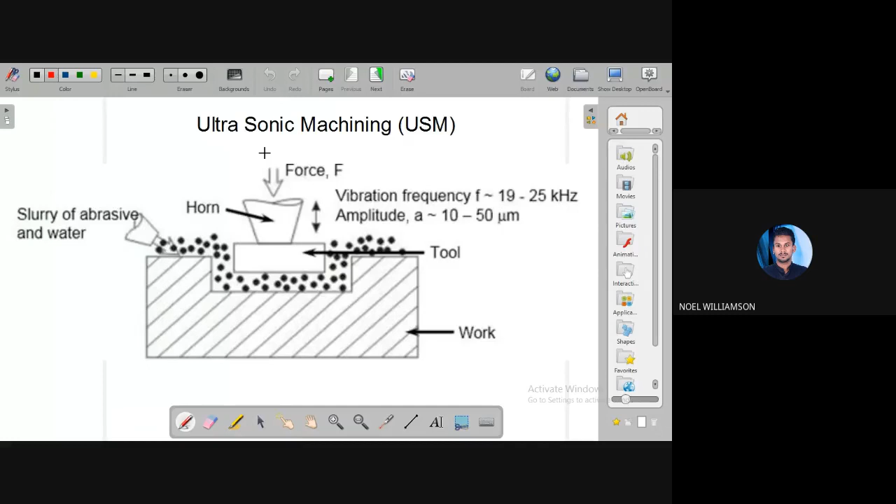Ultrasonic machining, we will see how it works. By the name itself we get an idea that this is a machining operation using ultrasonic frequencies, meaning vibration. Using the vibration of the tool with ultrasonic frequencies of the order 19 to 25 kilohertz, the tool will be vibrating.

Basically, here is the workpiece, and the tool is vibrating with low amplitude. Amplitude means the movement, how much it will be moving. So here it is low amplitude, meaning a minute movement at the micro level, in the range of 10 to 50 micrometers.

With low amplitude and high frequency, meaning within a second how many cycles it will vibrate, the maximum frequency means maximum velocity. So with high frequency and low amplitude vibration, this machining process is done.

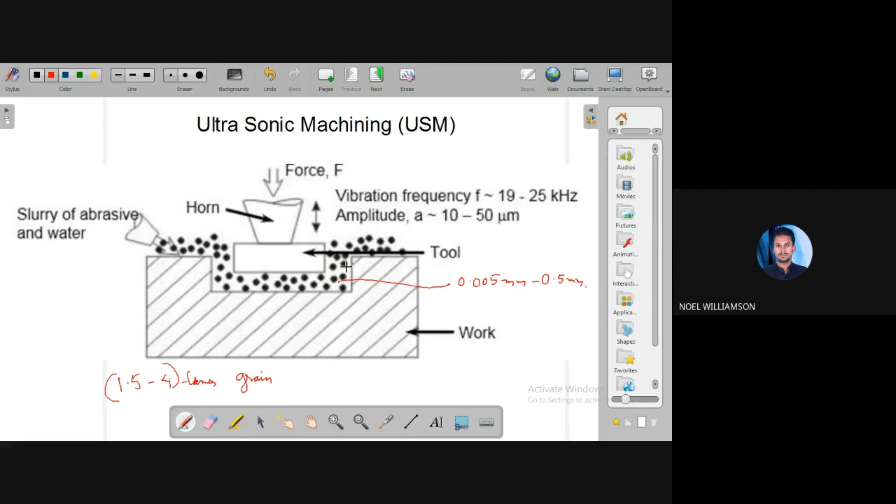Suppose mechanical energy is converted into electrical energy, or electrical energy into mechanical energy. Here, we are giving an electrical signal using electric power, which is transferred into mechanical vibration, and this vibration is given to the tool.

There is a provision for spraying the abrasive slurry, which is placed over or forced into the gap, and the tool which is being vibrated is given a particular feed.

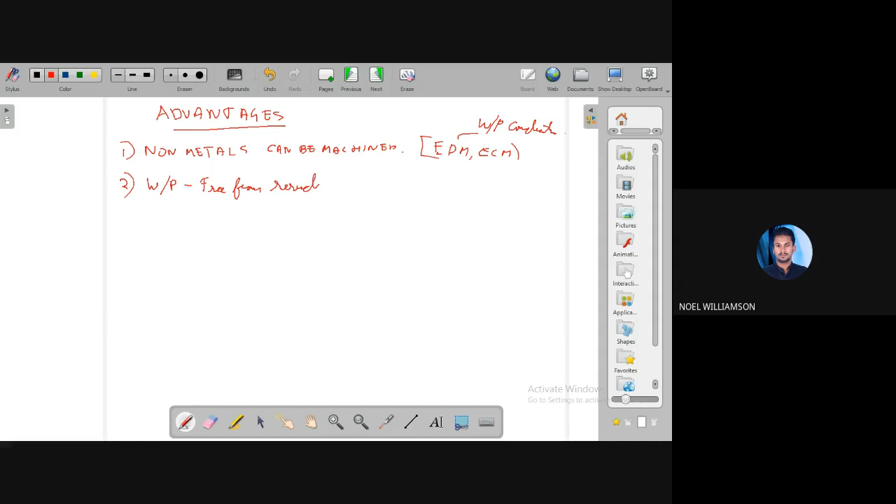And also there is no heat generation. Okay, that is the second point.

Next, this can be used to machine hard, brittle, fragile, and non-conducting materials. Even hard, brittle, fragile, delicate materials can be machined because not much force is acting. And even non-conducting materials also, because there are no circuit related operations acting. So these kinds of materials can be easily machined using ultrasonic machining.

Now, fourth one, very good dimensional accuracy. Through this process, we will be able to achieve very good dimensional accuracy. So accurate dimensions can be made possible using ultrasonic machining. And also regarding the surface finish, good surface finish can be obtained.

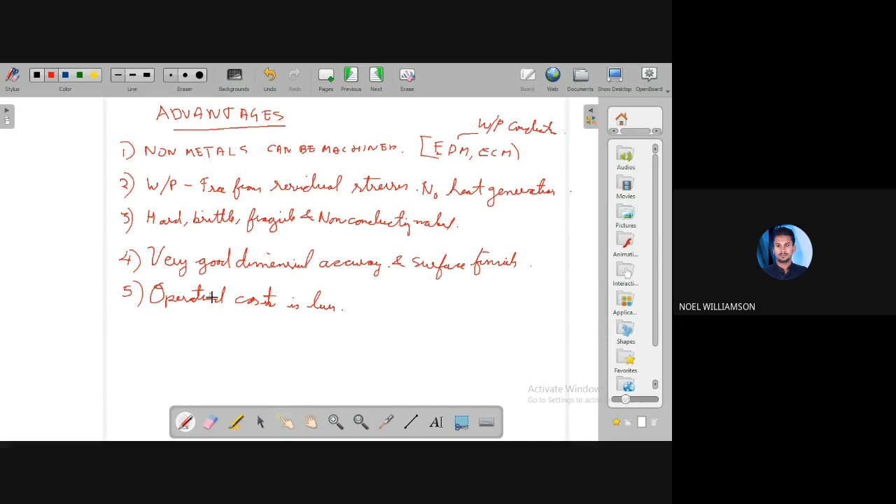Next is regarding the operational cost, not the initial cost, but the operational cost. Operational cost is less. The cost taken to do this work, the operational cost, will be less compared to other processes.

And finally, environmental friendly. Environmental friendly means not much pollution or noise pollution or anything like that, or chemical reactions. No chemical reactions take place. So pollution will be less, comparatively less or negligible, and similarly less heat.

So these are the main advantages of USM or ultrasonic machining. First, it can be used for non-metals where there is no conducting, unlike EDM and ECM where only conducting workpieces can be machined. Second, it is free from any residual stress because there are no huge forces acting on the surface, and also there is no heat generation. Third, hard, brittle, fragile, and non-conducting materials can be machined. Then, very good dimensional accuracy and surface finish will be possible. And the operational cost will be less for this process. And finally, environmental friendly. So these are the advantages.

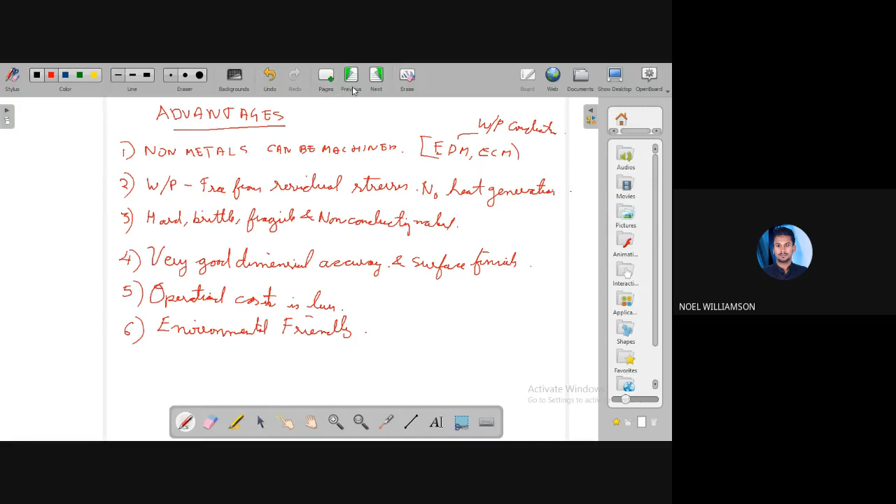Now, similarly, we will have some disadvantages also. So what are the disadvantages or limitations? Limitations of USM.

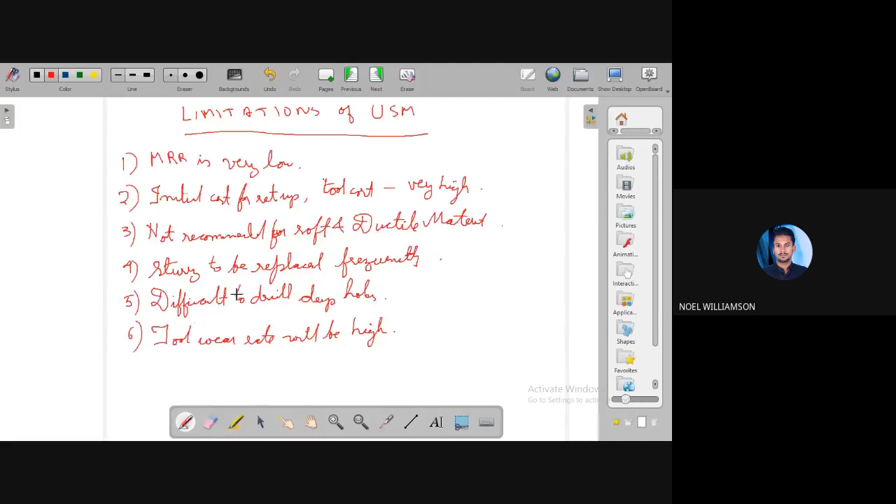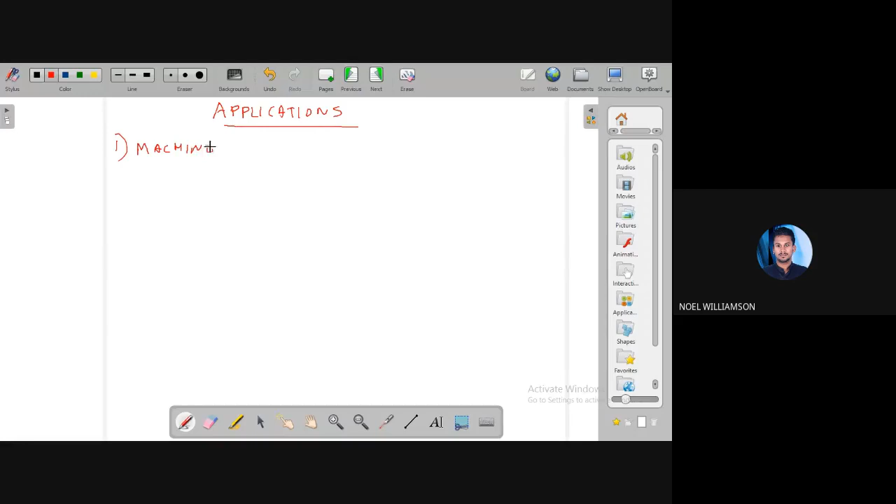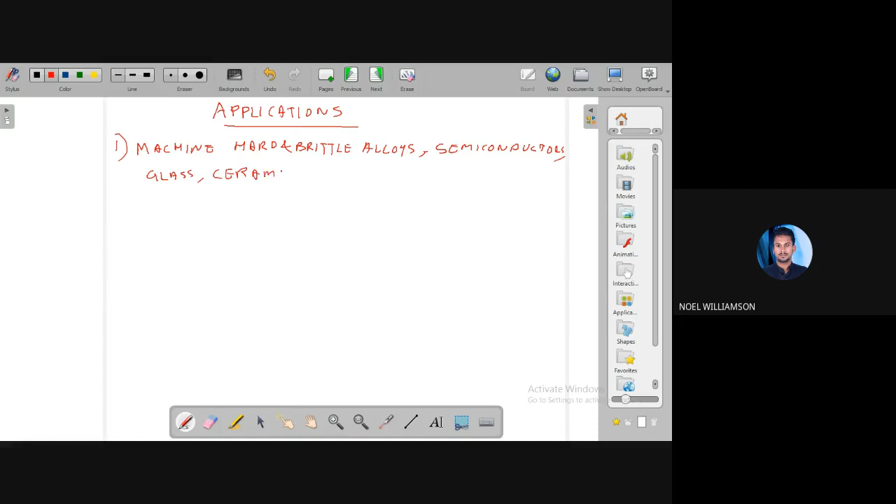Now we'll see the applications where this USM is used. First, it is used for machining hard and brittle metal alloys, semiconductors, glass, ceramics, carbides, etc. For these cases, we use ultrasonic machining.

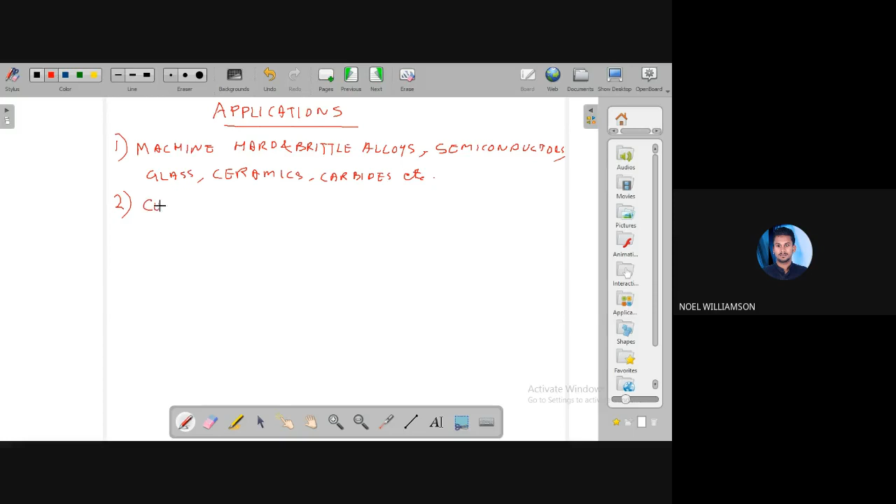Next case, for cutting industrial diamonds. Diamonds are used for tools in the industries, and for cutting that we use this technique.

Then in dentistry, for drilling holes in the teeth of a patient, it can be done using this ultrasonic machining. So this is the medical field.

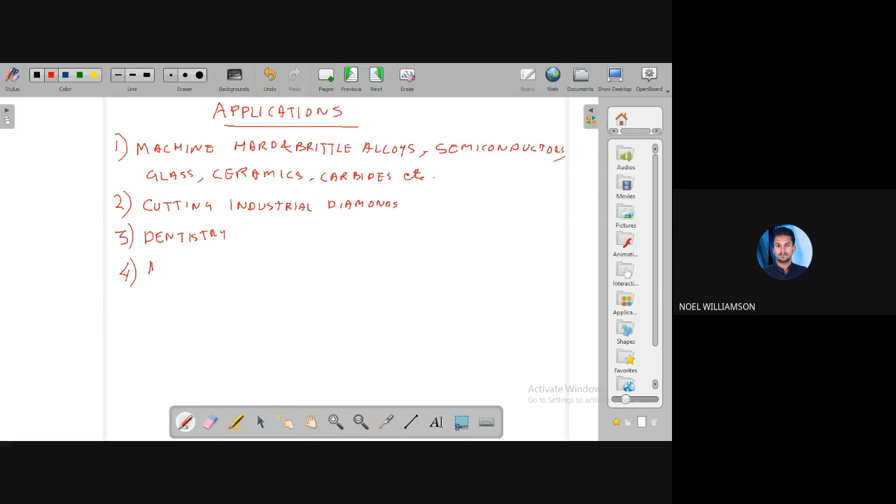Next, machining some proper shapes like round, square, or any irregular shaped holes. Irregular shaped holes or surface impressions, anything - this can be done using ultrasonic machining.

Now regarding dies, we have seen die molding and all. So those particular dies for many operations like wire drawing, punching, blanking, etc., can be machined using ultrasonic machining. Since machining by USM has good surface qualities, the final machining can be done using ultrasonic machining for these purposes - machining of dies for wire drawing, punching, blanking, etc.

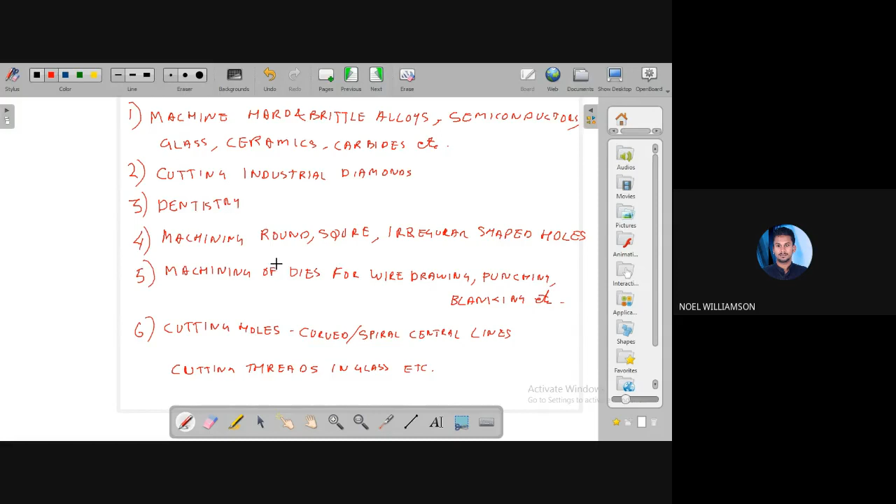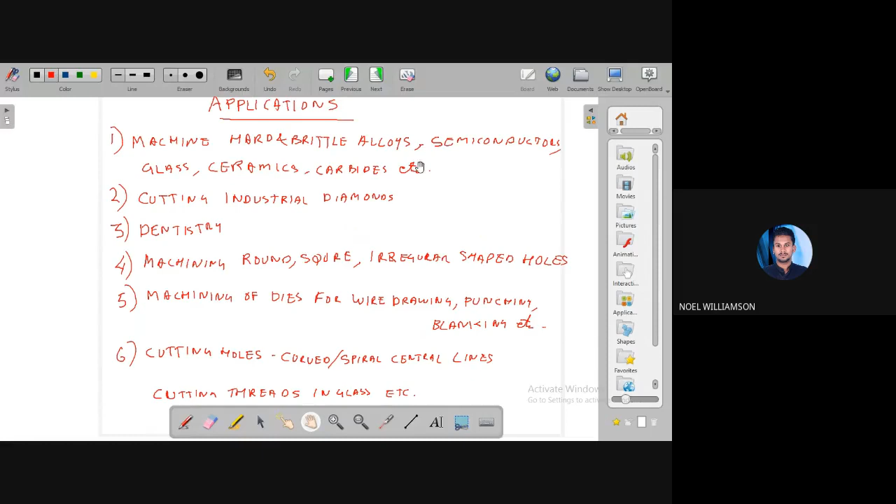So these are some of the main applications of USM. Now we will see a basic demonstration.

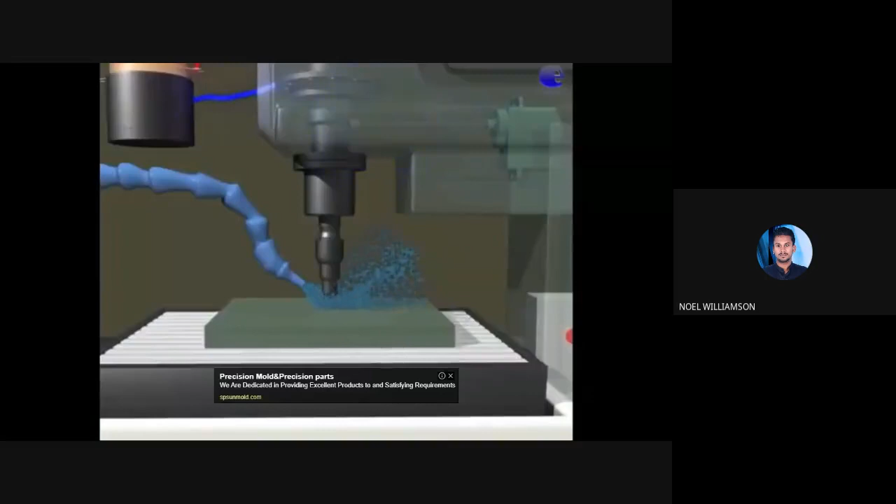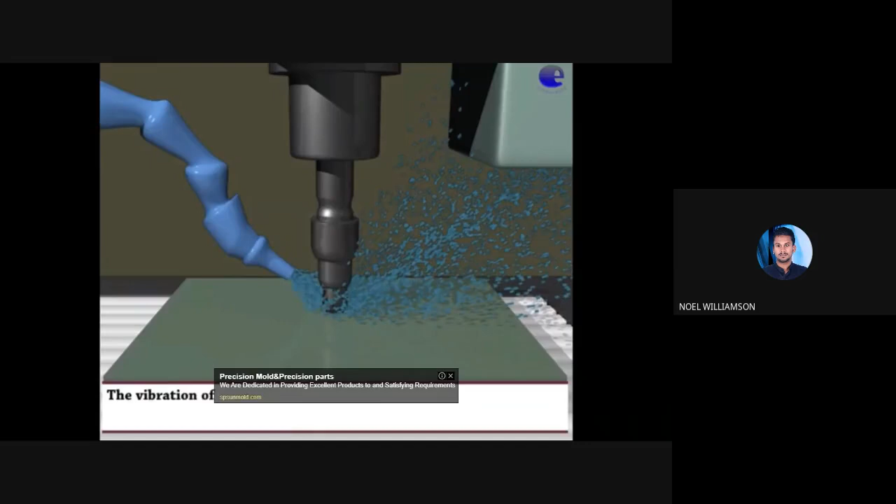Ultrasonic machining. Workpiece, abrasive slurry. In ultrasonic machining, a tool is made to vibrate at ultrasonic frequency of 20 to 30 kilohertz with abrasive slurry. The vibration of the tool and abrasive slurry removes material in the form of small grains. Machine surface.

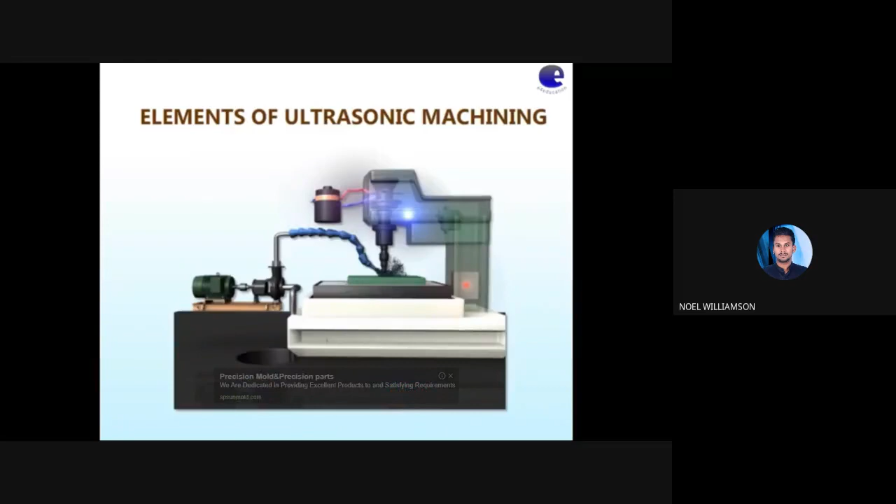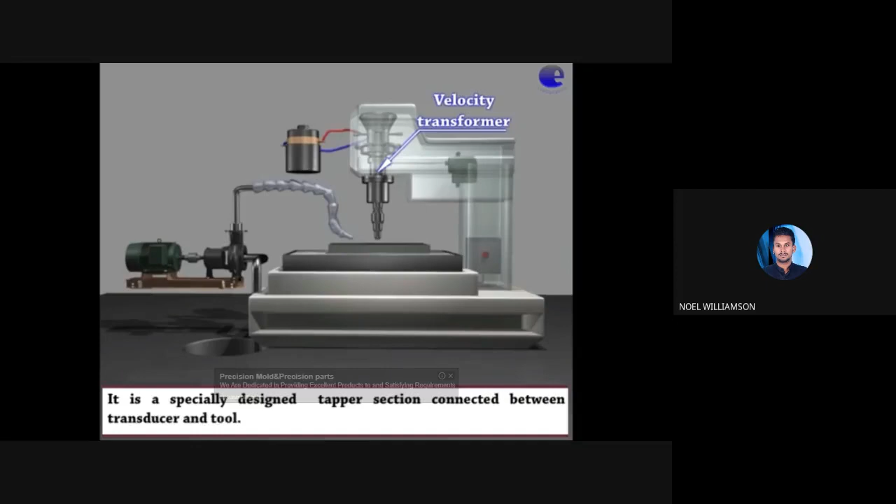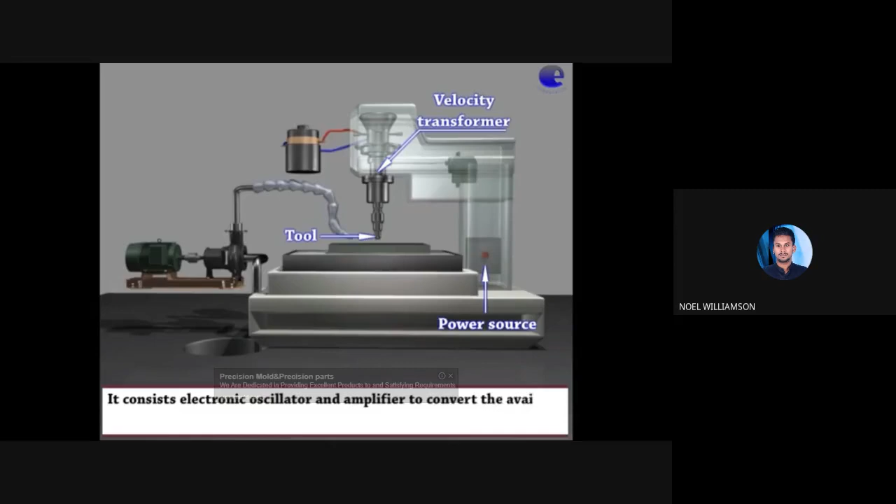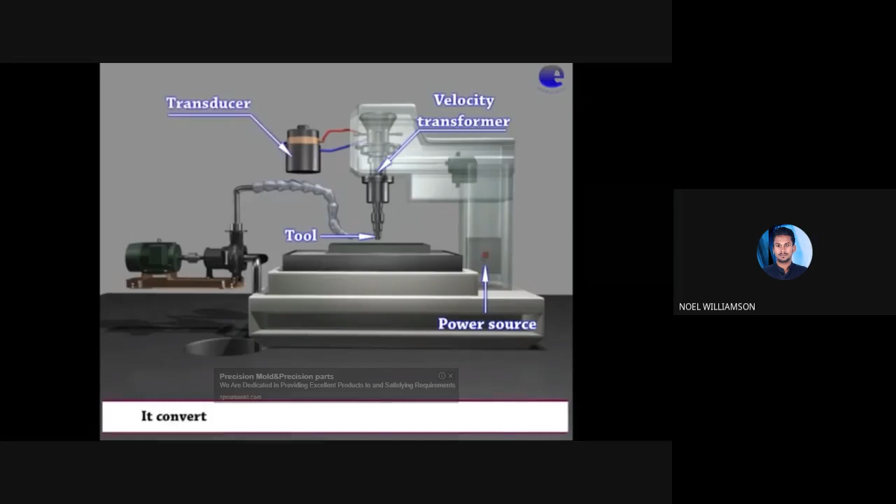Elements of ultrasonic machining. Let us see the 3D model of the USM machine. It has a velocity transformer - a specially designed tapered section connected between the transducer and tool. Tool. Power source - it consists of electronic oscillator and amplifier to convert the available electrical energy of low frequency to high frequency power. Transducer - it converts electrical energy into mechanical vibrations.

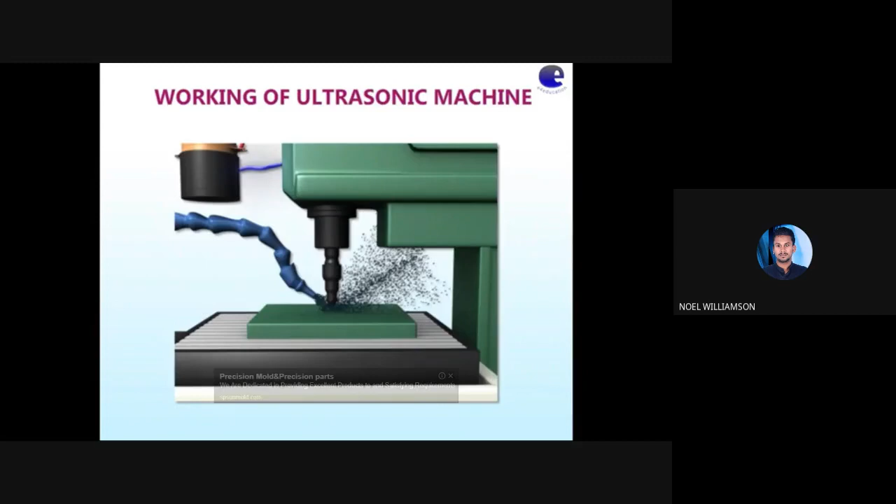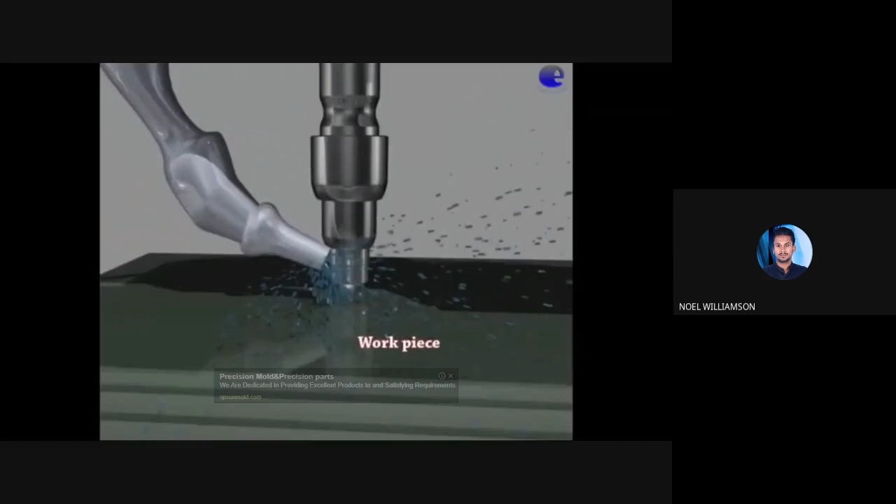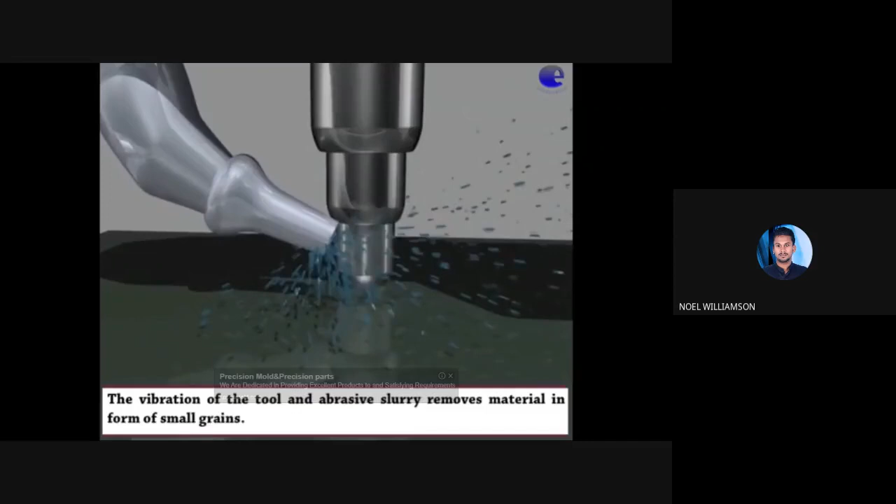Working of ultrasonic machine. This previous video we have seen about elements of USM. Now this video shows the working of USM. In ultrasonic machining, a tool is made to vibrate at ultrasonic frequency of 20 to 30 kHz with abrasive slurry. Workpiece, abrasive slurry. The vibration of the tool and abrasive slurry removes material in the form of small grains. Machine surface.